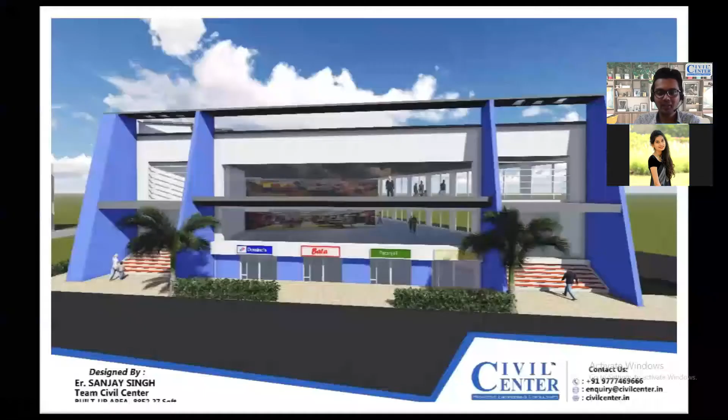So this is our summer internship program, 7 days, and this is the first day. What we're going to do here is pick one of our projects. We are a consultancy firm, as we've already told you, so we are going to pick a practical project which we have already completed, and in that project we'll take you through the entire steps of construction, what things we need to take care of, and how you can go through the construction process of any building.

So basically, as you can see here, this is the 3D exterior view of the building. This is basement plus G+1. Over the basement there are 2 more floors, as you can see in this picture. But the structural design was done for basement plus G+4 — there is the basement, ground floor, and 4 more floors above it. But they had constructed till now only basement plus G+1.

The location of this building is in Bhadrak, Odisha, and it is used as a commercial building — actually Reliance Trend is located at this place. As you can see, there are two entrances to this building, and both the ground floor and first floor are used for commercial purposes. In the basement, on the front side we have some shops, and the back side we can give for parking purposes, as you'll see further in this video.

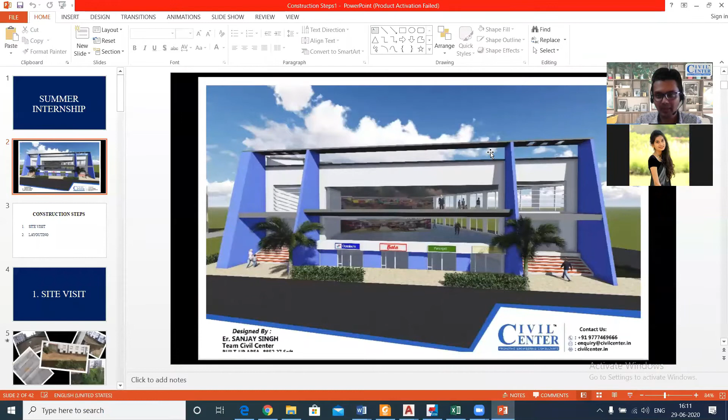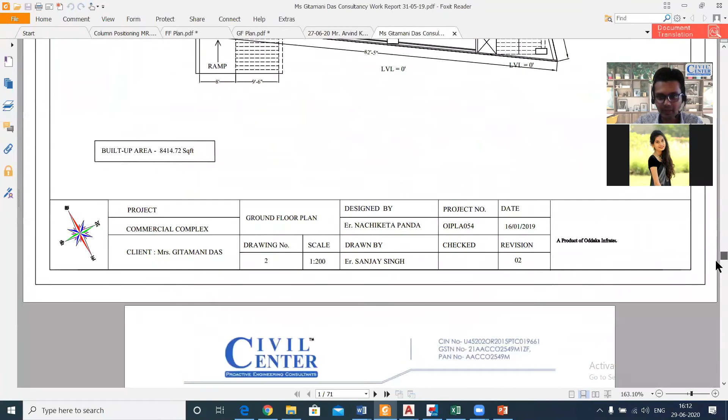Now I'll take you through some of the drawings of this building. Let me pause the share for a bit, open the drawings, and then turn it on once again. Okay, I'm just opening the report and drawings. So this is our report, I'll go through all the drawings one by one.

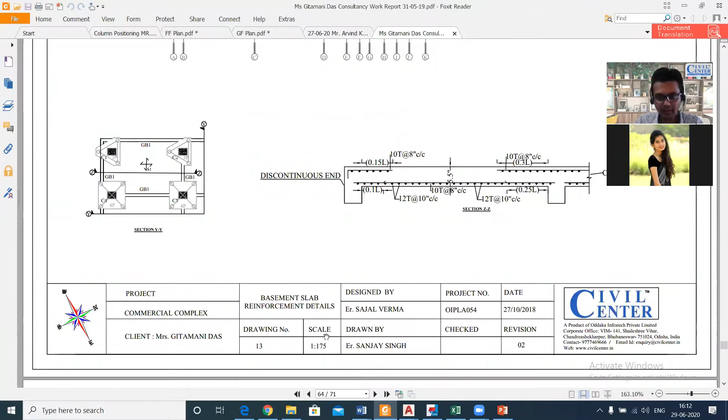So as you can see here, this is a slab — we'll come to it later. And as you can see, this is your commercial complex, and this is the basement slab details, we'll cover it later. Here we want to move towards the foundation part first, and then we'll cover the remaining portions.

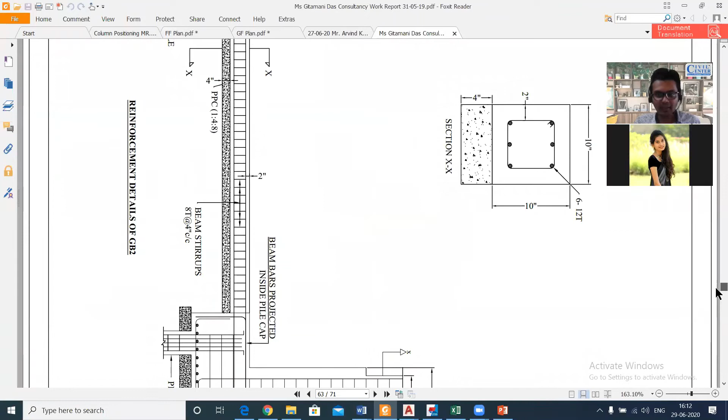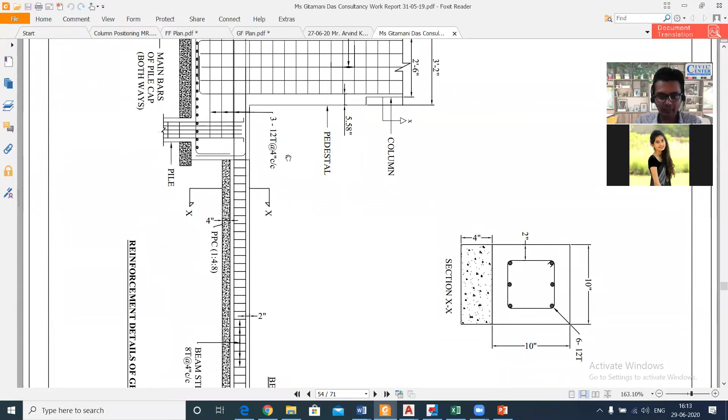We'll move on to our foundation drawings. So we have our foundation drawings here. As you can see, this is the foundation drawing, and it's also written here, reinforcement details of GB2. What is GB2 here? GB represents grade beam. As you can see, this is a pile cap, and this is another pile cap, and we have given a grade beam in between. This is your foundation layout, grade beam layout along with the foundation. So we have provided some pile caps — this is a 4 pile and this is a 3 pile.

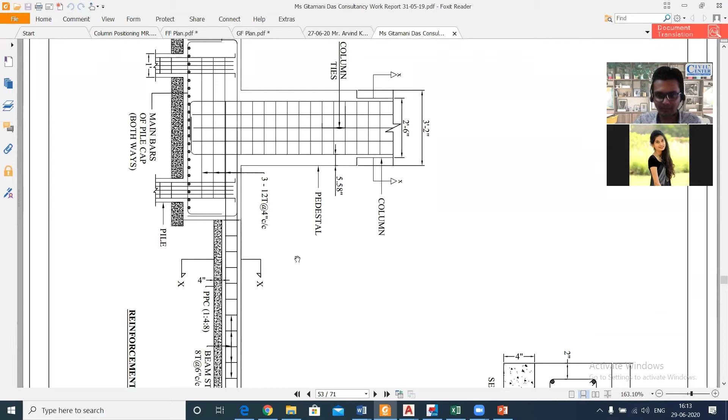Before that, let us ask and interact something. How many of you know what a grade beam is? Please raise your hand and speak. There are currently 10 participants here. So, anyone, what is a grade beam? Come on, feel free to say anything, it's an interactive session. If you don't feel like saying anything, you can type in the chat box also. Please.

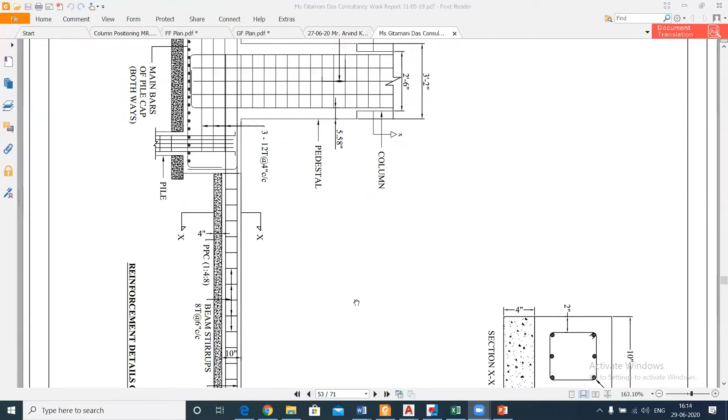Please, anyone? So I think I am not able to involve all of you. Okay, I'll try. I'll give my best. Let me give my best.

So basically, as you can see here, let me just take any member. As you can see, we have two pile caps. So you know what a pile is? We have two types of foundations, that is shallow foundation as well as deep foundation. So we have given a pile foundation here, and the grade beam is provided in pile foundation, where you have large amounts of loads. Since this is a commercial building, they have given a grade beam here. And as you can see, we have the two piles. Suppose you have two piles like that, and we have given a grade beam between them.

So the specialty of a grade beam is that... I'm just asking again, is anyone going to tell what is the difference between a grade beam and a normal beam? What is the difference between a grade beam and any other normal beam? Anyone? Please raise your hands. 9 participants, please. Okay. So no one is asking anything till now. Okay, so slowly we'll do that.

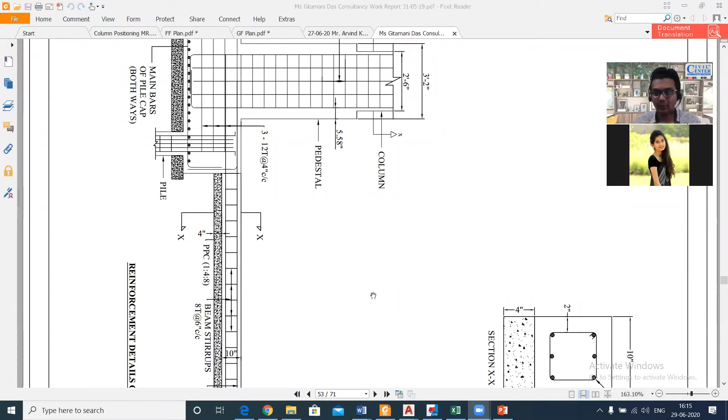So in a grade beam, the reinforcement at the top and the reinforcement at the bottom is the same, because it is subjected to tension. Both the ends just pull each other, so it is subjected to tension both at the top and the bottom. So we have to provide an equal number of reinforcements at the top and the bottom of the grade beam. And a grade beam connects two footings, or two pile caps in this case. Okay, so this is all about the drawing. We'll discuss the drawings in detail, just going through it now.

Now here we have the grade beam details. Along with the grade beam details, as you can see, we also have the foundation details. As I already told you, we have given two types of foundation here, that is, the 4 pile cap and this 3 pile cap. 4 pile cap means there are 4 piles, and 3 pile cap means there are 3 piles. So before continuing, can I ask a question?

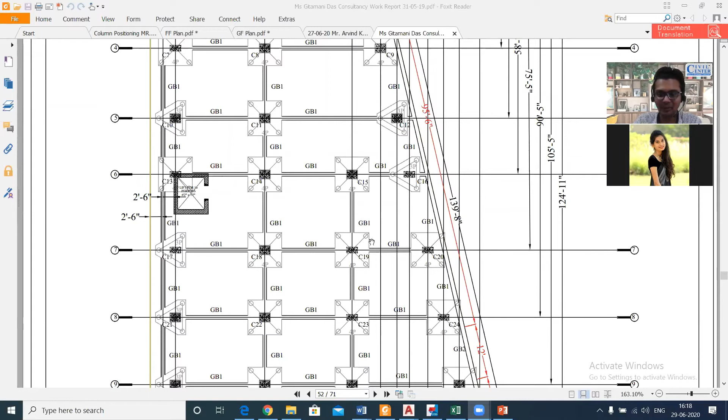So basically, we'll do this interaction in such a way that everyone can understand, even the final year students, even the second year students. And for that, I'll need your help. You have to ask questions; this is the first class. If you don't want to say anything, you can just type in the chat box that you want to discuss this thing in detail.

So, can you tell me in the chat box, what is the unit of the soil bearing capacity? What is the unit of the soil bearing capacity? Okay, I haven't got any chat yet. So no one is telling. Okay, please give it a try. It's not that if you give a wrong answer we will scold you or anything. Just give it a try. You don't have to Google. Just give whatever you think is the answer.

Newton per mm square, one answer. Good. This is the right answer actually. The unit is kilonewton per meter square or Newton per mm square. Basically, because it depends on the footing area, the area of the soil, and the load acting on it, the unit is kilonewton per meter square or Newton per mm square. And if the soil bearing capacity is... okay, we have got another chat here, let's just take it.

Kilonewton per meter square, that's the right answer, Ananya ma'am. So both Ananya ma'am and Asha ma'am have given the right answer. The bearing capacity of this particular project was around 19 kilonewton per meter square, and it was also an area where water logging problems were there. That's why we had to go for the pile foundation.

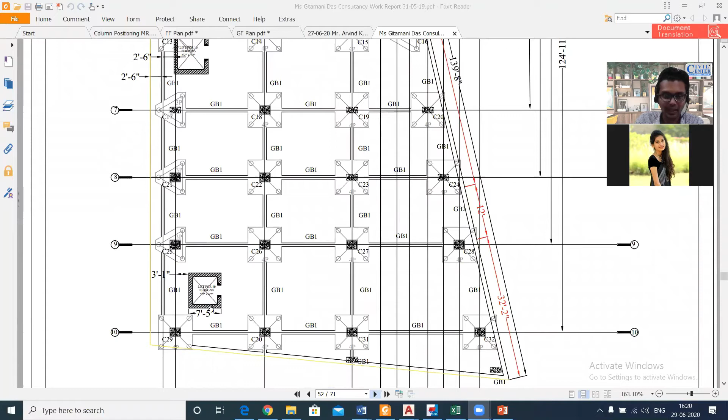So this is our pile caps, 4 pile caps, and we had provided pile foundation because the bearing capacity was low here. And as you can see, this is the provision for the lifts: we have a lift for 10 persons in the front portion and a lift for 16 persons in the back portion, in the middle portion. And as you can see, this plot is not exactly rectangular, as happens in most cases. It's tapered kind of.

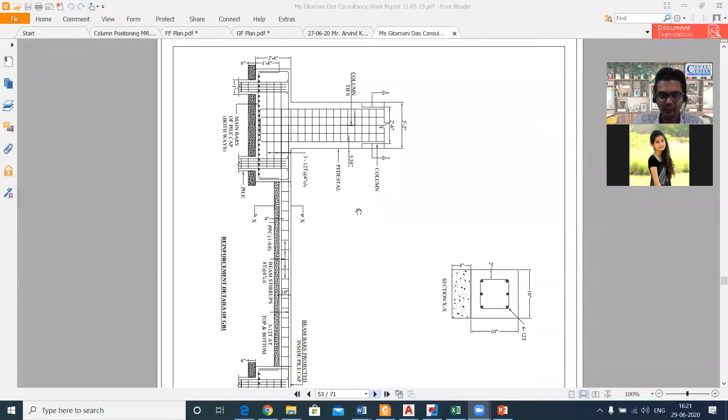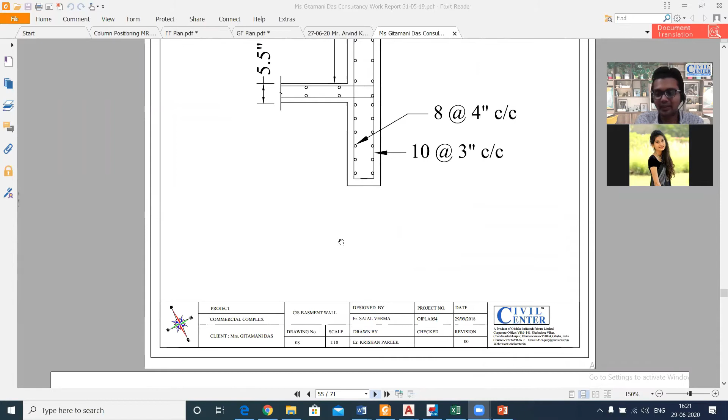We have also discussed the drawings of the grade beam as well as the pile cap. So these are the basic idea of the drawings of the foundations. As you had seen in the picture also, we have a basement here. This was basically a low-lying plot, so we had to give a basement wall. So this is the details of the basement wall. The basement wall is an RCC wall basically.

So for the second year students, do you know what RCC is? Or should I tell you? You can just type yes or no. No one is judging you here.

So basically, RCC is reinforced cement concrete. The combination of cement, sand, and coarse aggregate is called concrete. And if we add reinforcement in it, which means steel rebars, then it is called RCC. Currently, there are a lot of materials available, like GFRP, CFRP, glass fiber reinforced polymer, and various advanced materials which can replace concrete or provide advanced forms of concrete. But RCC is the basic form, reinforced cement concrete with steel rebars.

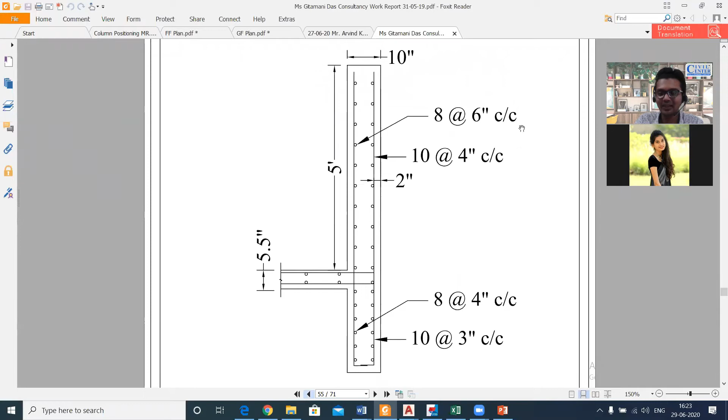So in the basement, RCC walls are given. These are the details for the RCC wall. As you can see, 8 mm bars and 10 mm bars are used. And if you are wondering what this 8 at the rate 6 inch center to center is, the diameter of these round bars is 8 mm, and they are given at a spacing of 6 inch. So the distance from here to here is 6 inch.

And I can show you the distance. This distance between two reinforcement bars is 6 inches, and this distance is for the 10 mm bars, which are given at a 4 inch spacing. So as we can see from here, these are provided like this. The 10 mm bars are given at a spacing of 4 inches.

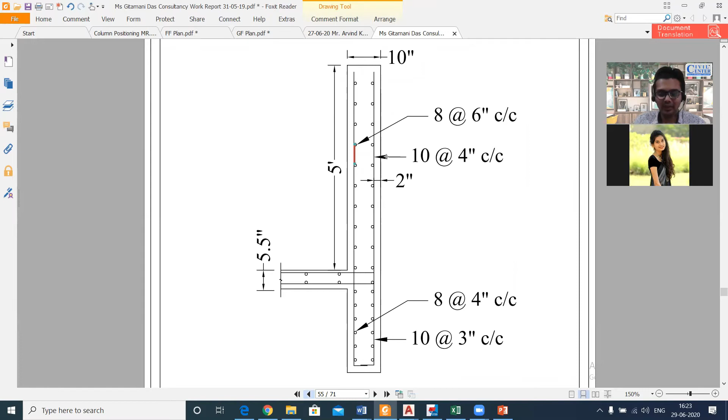So we'll discuss this in detail also. Now this is our column details. So here we have an interesting question to ask. Someone has given a chat. Let me just check it.

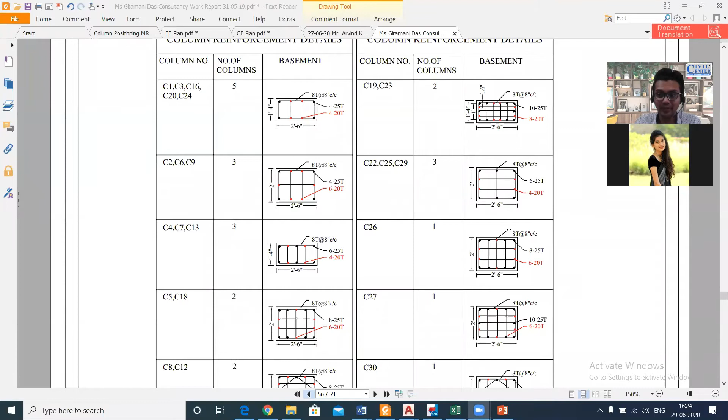So basically Priyanka, sorry, the medium of this instruction is English, so I have to translate your question to English because some people have requested that. So basically she is asking how do you know where to provide columns in a house. So let me just go through. We have some structural drawings here and the architectural drawings also here. Let me just take you to the architectural drawing here.

As you can see, the built-up area is around 8,471 square feet. So there are certain rules for assigning columns, which can also be called thumb rules. Before going through these rules, we have to know the basic concepts behind structural analysis and structural design. So some of you are from third year. You've already studied SA 1 and SA 2. So can you tell me what is structural analysis basically?

So no one is answering. Let me tell you, at the end of this session, I want you to be free and I want you to be telling anything, whatever you think. It's not like you have to mug up a bookish definition and come up here. Whatever you think, what is structural analysis?

Let me just tell you, I have this calculator here, and I'm just applying some load on this calculator. So this load is the external load, and after I apply this external load on this calculator, some forces will be developed in this calculator, and these forces are the internal forces, and you can name them as shear force, bending moments. So the calculation of these internal forces is called structural analysis. This is the simple definition.

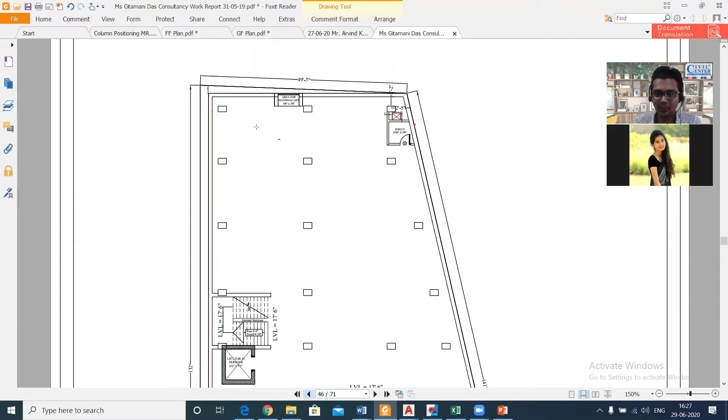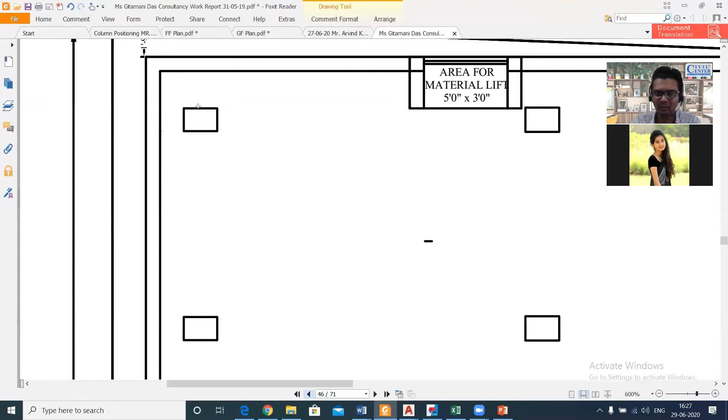Suppose, for example, you have provided a column here, and the size of the column is 450 into 250, and if it is able to bear all the internal forces which are generated in this building, then it is pass. Otherwise, it is fail. So this process of checking whether it's pass or fail from the internal forces is called structural design. As simple as that. And if you still didn't understand, please raise your hand. I'll communicate and clear all your doubts.

And so the question of Priyanka ma'am was how to assign the position of columns. So basically there are some rules which I told. Suppose in a residential building, in every 80 to 100 square feet, you need to provide one column. So if you have a building of say 1600 square feet, 1600 divided by 80 gives a maximum of 20 columns. If you divide it by 100, then you will have 16 columns.

So in a plot area or a built-up area of 1600 square feet, you can provide 16 to 20 columns. So what is this built-up area, which is written here? So there are two types of basic area. Very basics we'll discuss. One is plot area, the area of the plot.

The area which you get for constructing is called the plot area. And the built-up area is the area which you select or choose for constructing the building, because you will not build your house in the entire plot. You leave some space for gardening. You leave some space for walking, or any fire safety purposes, or any ventilation purpose. You leave some space in the front side, in the back side, and both the sides.

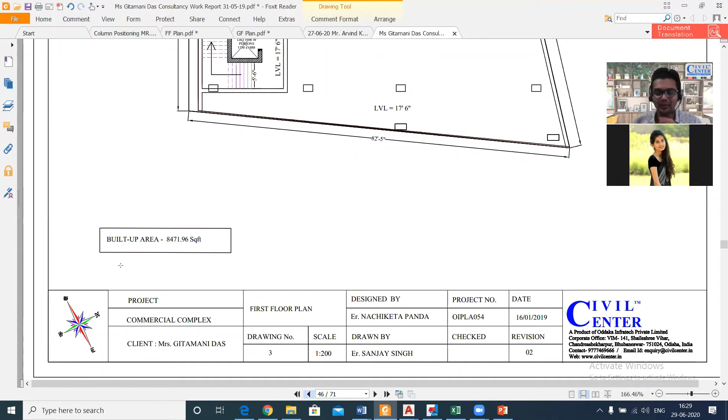So after leaving this space, the area in which we actually construct the building is called the built-up area. And for the built-up area in a residential building, for every 80 to 100 square feet, we need to provide one number of columns. And there are also some other aspects of providing columns, which we will discuss slowly. I have given one aspect in today's class.

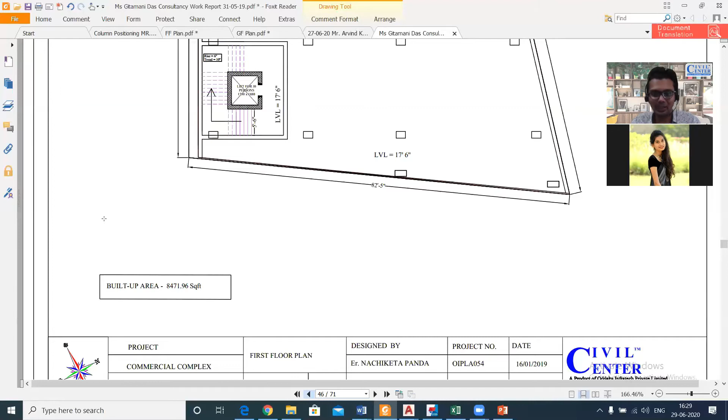Please remind me, Priyanka ma'am. We'll just discuss in detail. One aspect we'll discuss in all the classes.

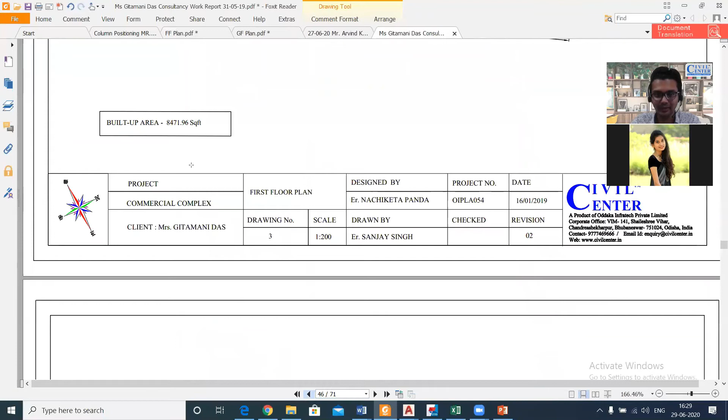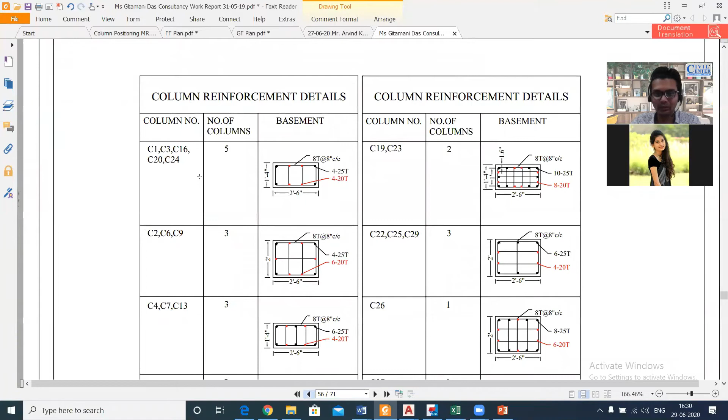So we have provided columns here. As you can see, these are the columns which we have provided, and this is the architectural plan of the bottom portion. So before that, let us just go back to the structural drawings and check the columns. So the screen is visible, I hope. So these are the columns which we have used here. These are the column details. Let us just zoom in.

So the client wanted this in feet and inches. That's why we provided it. It's 1 feet 4 inch to 2 feet 6 inch columns, and the reinforcement used are of 20 mm and 25 mm, and the ties used here are of 8 mm. So can anyone tell me the difference between tie and stirrup?

Come on. We have 8 participants among all of you. Anyone? Okay. Ananya ma'am, please speak. You can unmute yourself. Ananya ma'am, you can speak right now. Okay, I think she is not hearing. Ankita ma'am, you had also raised your hand. Can you just unmute your mic?

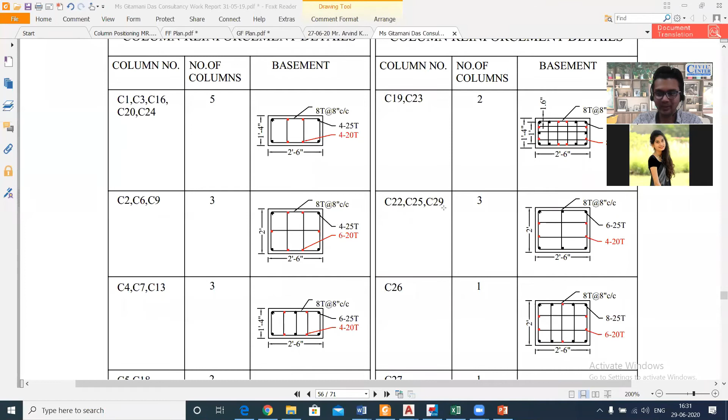Priyanka ma'am has said tie is in beam and stirrup is in column. Okay, do you agree with it? Ties mean to hold the column, and stirrups means beams. So Ananya ma'am has given the right answer. Priyanka, you just mixed it up. So tie is given in columns and stirrup is given in beams. Both are the same thing, but the nomenclature or the naming is different. So these are the differences between tie and stirrups.

So we have given here 8 mm ties, and the longitudinal reinforcement given here, the red ones, are of 20 mm. So we have 4 bars of 20 mm and 4 bars of 25 mm as the main or longitudinal reinforcement, and 8 mm bars at the rate of 8 inch center to center are the ties or the transverse reinforcement. So the main reinforcement is also called the longitudinal reinforcement, and the ties are also called the transverse reinforcement.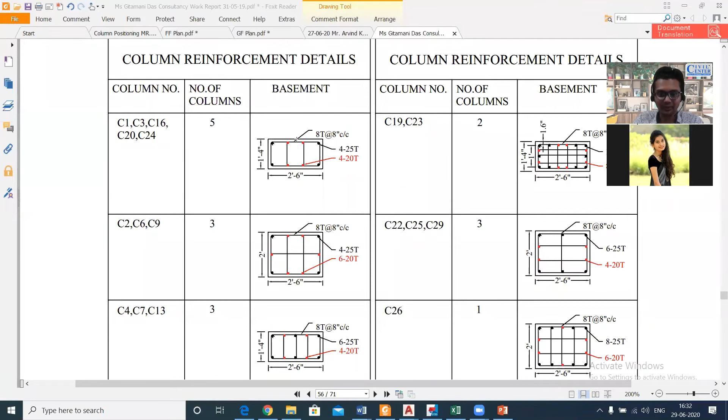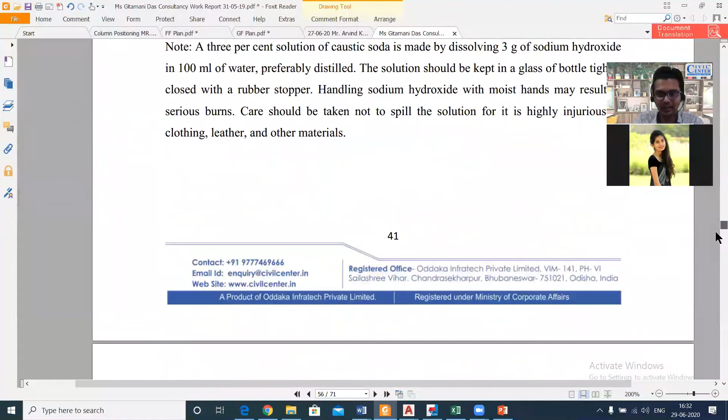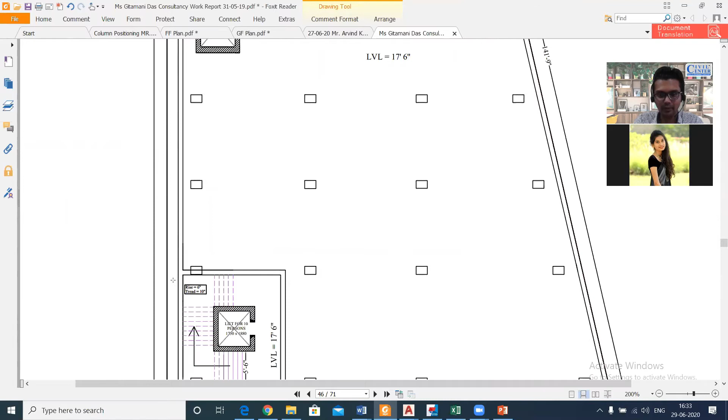So these are the columns which have been given here. For the total number of columns, we'll just go back to our architectural plan. Let us just count the total number of columns given here: 1, 2, 3, up to 34. So 34 columns have been provided here, and let me just divide it.

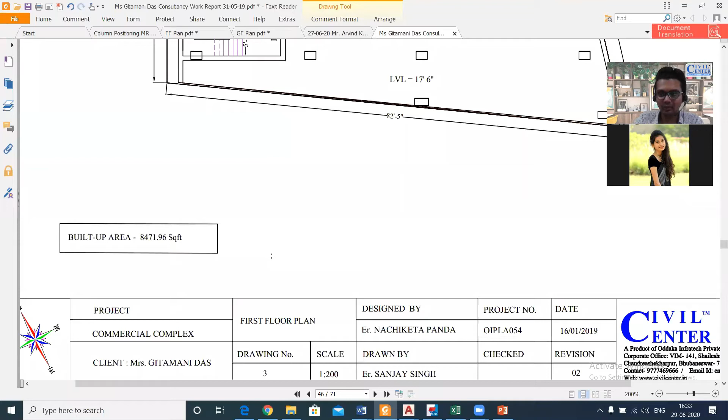8,471.96 divided by 34. We have here 249. So for every 249 or 250 square feet, we have given one column. So one column takes the load of approximately 249 square feet.

So it's a commercial complex. Anyone wants to speak? Ask anything, please feel free.

Okay, so it's a commercial complex. That's why the size of the columns is more, and if you give less number of columns, then the size of the columns will obviously be more. And in a commercial complex, we require some free spaces. Like we have a shopping mall here, so in the shopping mall we don't want many columns in between, so that we can ensure that maximum space is free.

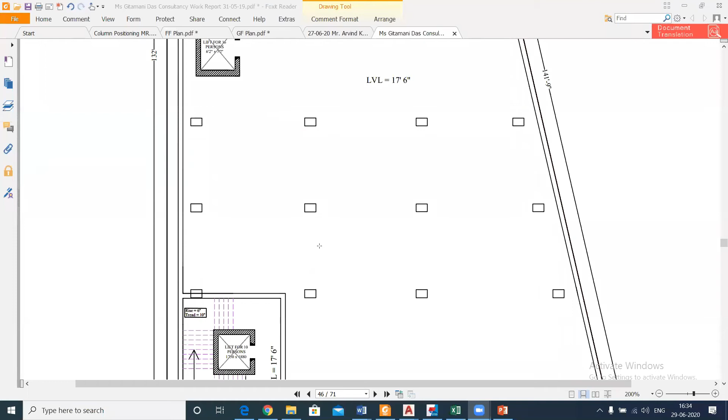So that's why we have provided it like that: around 250 square feet, we provide one column. But in a residential building, for every 80 to 100 square feet, we can provide one column. So as you can see, that's the plan for the first floor.

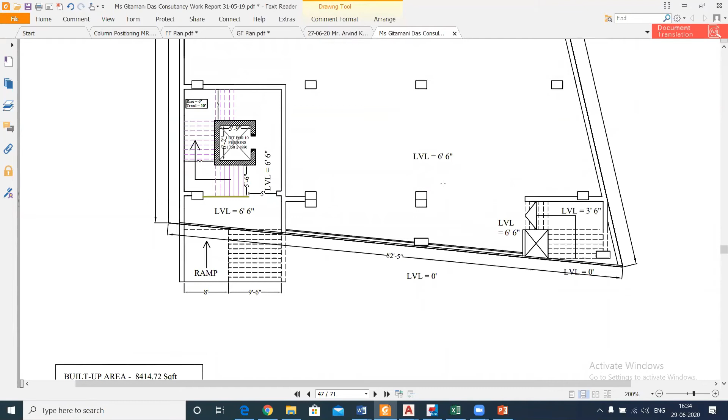This is the ground floor. As you had seen in the 3D diagram also, this was the basement and this is the ground floor. We have a ramp here, another ramp here. These are the two positions for the entry to the ground floor, and there is a lift with a staircase also here, and this is the shopping mall part in the ground floor. This is symmetrical. Another lift we have here, and in the lift only the basement shear walls are given.

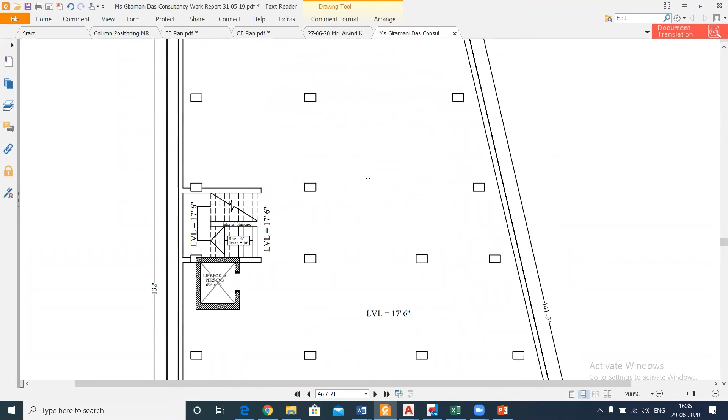So this is all the architectural plan of the ground floor. Moving on to the first floor. The first floor is also similar because it is a shopping mall. We just have a toilet here, and all the remaining things are similar in the first floor.

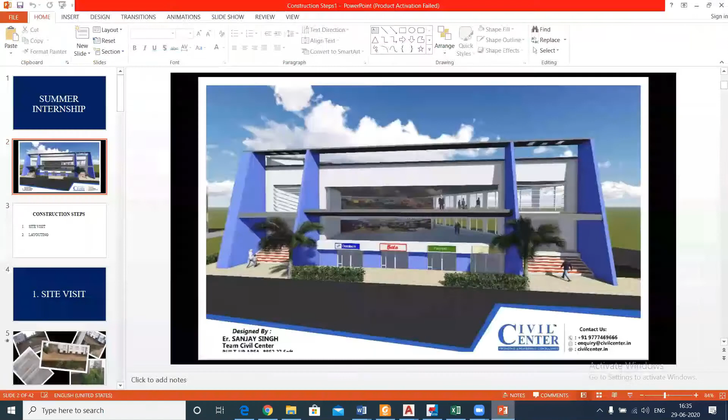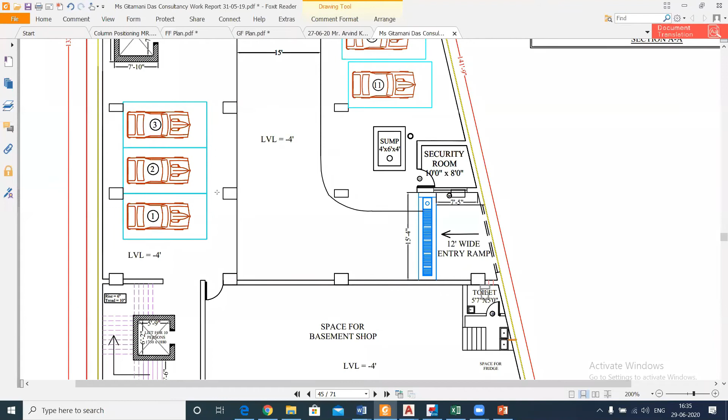Now moving on, this is the basement. As you can see, this portion is the basement portion. In the basement portion, we have given space for some shops. As you can see in the 3D also, 1, 2, 3 shops are there. This is the entry, and then we have our parking, because in any commercial building complex, you need to give the facility of parking. This is the security room, and all the parking details are given.

So let us say that you have just received all these documents as an engineer, and you have been handed over the project. What is the first thing you need to do? You have the 3D drawing, your architectural plan, the structural drawing, all this data. Can I get an answer on this? For starting any construction project, you have all the drawings. Then what is the first thing you need to do?

Okay, anyone? There are some 10 participants here. No one is answering. I hope that I get to involve all of you soon. I'll try my best for that, so that you guys don't hesitate to ask any questions.

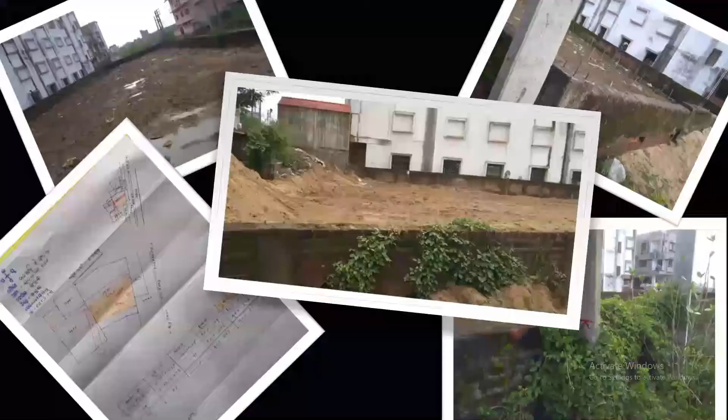So let us discuss our construction steps. The first step in any construction is the site visit. What is a site visit? Why do you need a site visit? I have all the drawings and want to start construction, so why do I need a site visit? Anyone? Okay, let us discuss. As I told you, this was our live project of a B+G+4 building, which is designed, and which is constructed for B+G+1, that is basement and 2 floors above it.

So this was the site, and there are some pictures here. This is the land document. Before starting construction, you need to check the land document, because it shouldn't be that you have taken the project, and then in between the government comes and tells you this project is on government land and you can't construct on it. You don't want any such difficulties, so you have to check the land document.

The land document is made by the approval authority of that area, and the person is called Amin in the local language. Amin means someone who makes land use maps. As you can see, there are some road demarcations here. We have a front road here, and at the side also we have a road. The detailed area and the surrounding directions are also given in the map by the Amin, or the land document.

After we have the land document, we need to check the site conditions. This was our site when we went there. It was a bit lower than the road, and water logging was also there. This building is a V-Mart mall; V-Mart is a brand of mall, and it was located on the left side of this plot. On the back side, we had some residential complexes. On the right side, we had a Kacha road, and there were some electric poles also on this side.

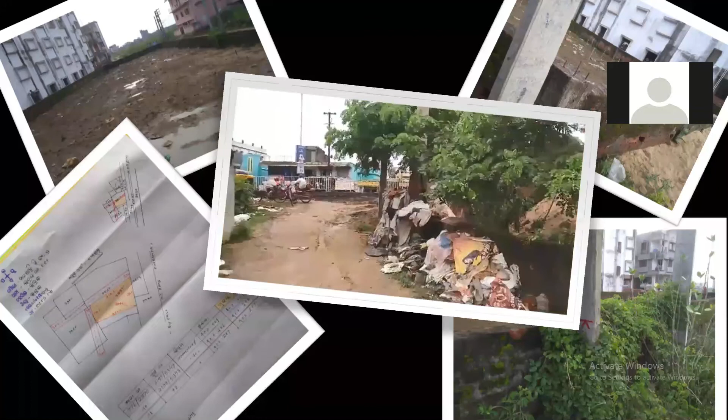Now, just moving on, as you can see, this is our front side. Skip too much. As you can see, now see what is the difference between the front side and this. You can see that this is the road level, this was the road level, and this was their plot level. So there is some difference of more than 5 feet, 6 feet distance, the height difference between the road level and the plot level.

So while coming to a site, we need to observe certain points, which we'll discuss in today's class, and all the remaining things we'll discuss in the upcoming classes also.

So we'll just continue the video. As you can see, we have an electric pole here, and this is the boundary. And another question I want to ask, as you can see, this is the boundary, and you can see some holes have been made. Is this visible? There's some holes which have been made in the boundary wall. Can anyone tell what is the purpose here also? We have holes with pipes. What is the purpose of these holes which have been done in the boundary walls? Come on.

To avoid water logging. Yes, Ashmita ma'am, you have given the right answer. This is done to prevent the water logging.

Actually, as you can see here, the road level was at a higher distance from the plot level. So this was given so that in case of any rainy seasons, or any moisture related conditions, the water logging doesn't occur. All the water which is trapped due to the soil filling can come out through these walls. Otherwise, this wall will just break and this wall will just fail.

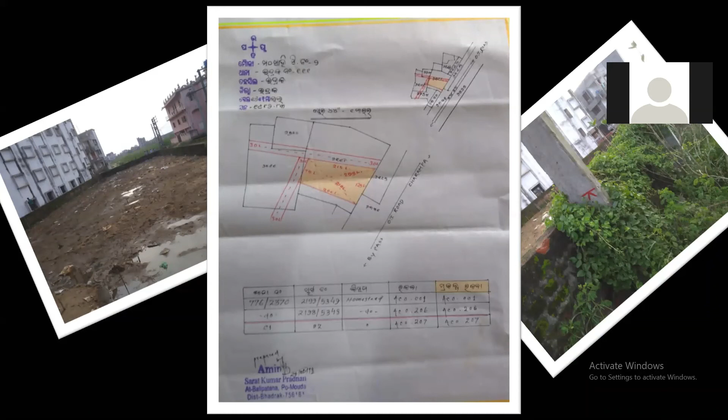The survey can be done with the help of a total station instrument. Some of you, who are in third year or fourth year, might have heard of this instrument called total station. With the help of the total station, you can measure the accurate dimensions of the plot. So this is the fourth point.

The fifth point is again about some site conditions. As I have shown you, we have a transformer here, an electric transformer here.

Suppose we are constructing a building, I don't want it to be in a hazardous zone. Suppose we want to construct a G+4 building here, so we have to shift this transformer so that the people constructing the building are safe, and also the occupants are safe. You can't have this transformer here. You also have to add the cost for transferring this electric transformer to another place, so that the safety of the workers and the inhabitants of the building is maintained.

So these are certain things you need to consider during any site visit. I hope all these 5 points are clear, and if you have any doubts, you can raise your hand and ask your questions. So does anyone have any doubts regarding that?

Okay, you don't have any doubt, that's not possible. It's probably that I couldn't involve you. We'll try our best to make this session interactive.

So in today's class, we discussed our training program and internship program, which points we will cover. The next point is our site layout, which we'll discuss in brief here and in detail in the next class. We'll be dealing with a live project of a G+4 building, which has been constructed for G+1. G is for ground floor, +1 means one more floor above it. So the building design was for basement plus ground floor and 4 more floors above it.

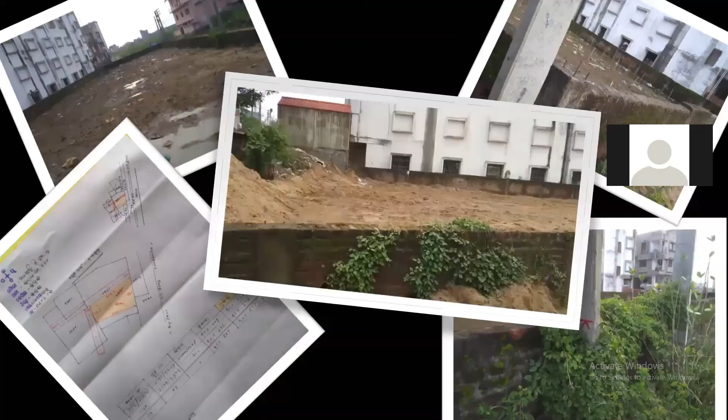The purpose of this building is for commercial purpose, and in this internship, we'll take you through all the activities of the construction of this building. So among all the construction activities, the first step we discussed is your site visit.

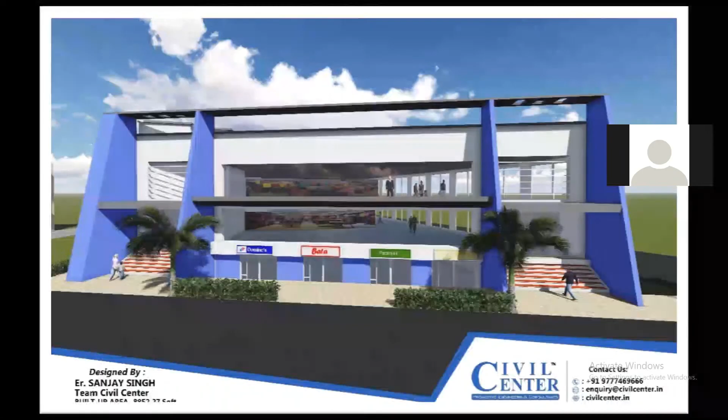In the site visit, we discussed 5 points. Hope all these 5 points are clear, which you need to take into account while doing any site visit. If you have any question, you can ask right now, or else we'll wrap it up after giving a brief idea about the layout. So any questions? I'm just waiting for questions, please.

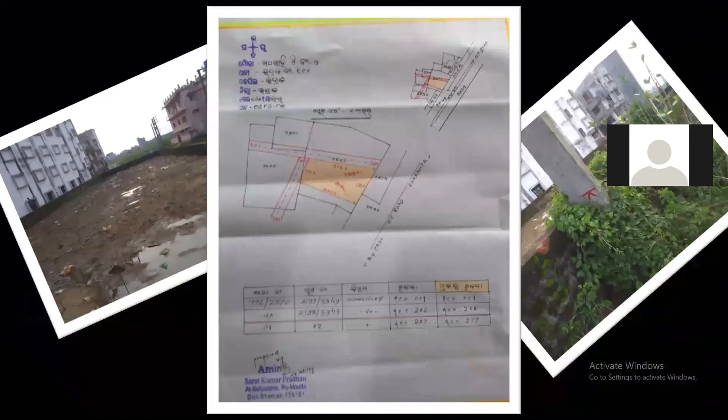So basically, we had just given— yeah, please speak. Someone had just unmuted the mic. You can just raise your hand and then you can speak. Anyone? No.

Okay, so the next step which you have— okay sir. So you're not audible, can you just— Actually sir, I have to make an announcement before you wrap up the class. I need to make an announcement. Sure, please go ahead.

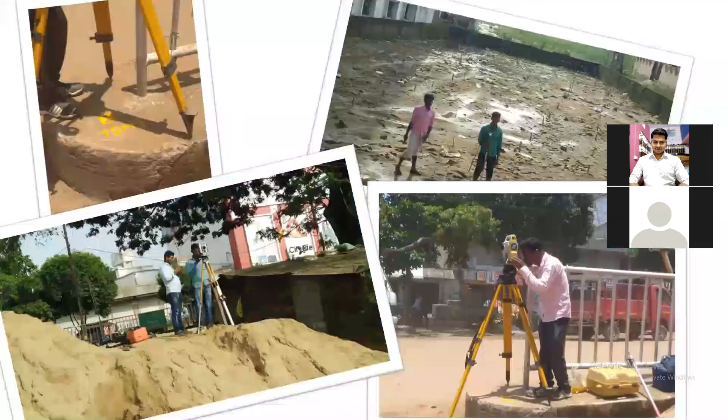So basically, what is the layout? Does anyone have any idea what layout is? Okay, so none of you are telling anything. So we'll wrap up this class right now, because I want this to be an interactive session. In the next class, hope we'll ask some questions and interact, and after that we'll continue these classes from the layout part.

Okay, so we'll end this session for now. I'll meet you in the next class. Please be interactive, and bring more of your friends also. After you complete this internship, I guarantee you'll know a lot of new things about this construction sector, construction industry, and you'll be happy that you joined this course. So please make it an interactive session. Ask questions, ask all your doubts, so that you can learn. This is not a classroom, no one is going to scold you for asking anything. You can ask basic to basic questions, anything, because you are here to learn. Don't feel like anyone asking will judge you—no one is judging you. You can ask anything, just feel free, and we'll continue from layout in the next class. So see you in the next class, we'll wrap it up for now. Bye everyone.